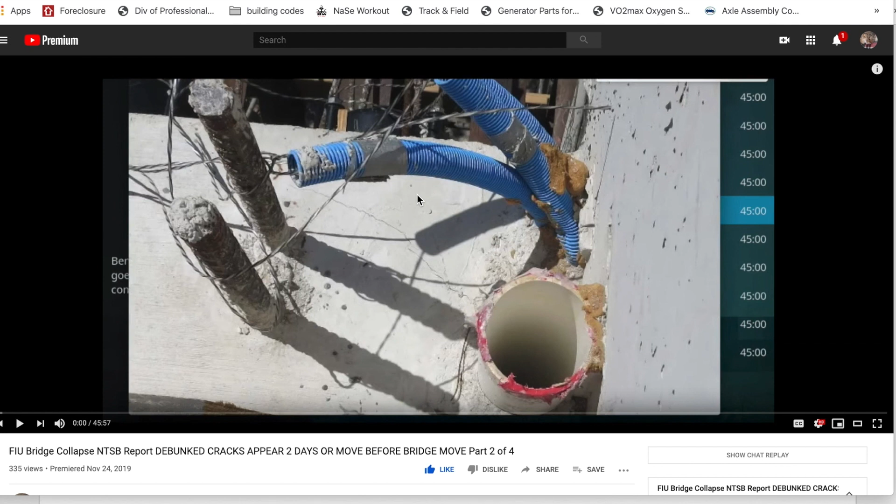Okay, so I had my engineering friend over the other day, and I'm trying to talk him into doing a YouTube channel. Ray, this is going out for you. Ray and I were talking about the FIU structure. Ray's a professional engineer, had a lot to do with the Department of Transportation, roads and bridges. It'd be nice to see him do some content. He's retired from the Department of Transportation, not from engineering. I'm trying to talk Ray into doing his own channel and sharing his knowledge over his 30 years. This is the smoking gun.

Well, let's jump into it before I get to the smoking gun. Let's back up to: last FIU bridge defendant settles with 3 victims. So this is about Louis Berger not settling. Louis Berger is going to go to court, which is awesome, apparently, at this time, proceeding to court, it looks like. The lone holdout of the $103 million settlement between victims of the March 2018 FIU bridge collapse and the companies they sued for negligence, Wednesday announced it had settled 3 of the 6 wrongful death lawsuits.

Do you realize they sued them for negligence and they settled? So this judge must have put something on there that you're settling, but I'm not finding negligence, I'm guessing. Because finding negligence would be enough for them to prosecute already. If the judge already found negligence, that's weird, right? Why wouldn't a state attorney just find negligence also? Well, of course we know why — her conflict, and money is a conflict. These people are millionaires, right? And millionaires don't really go to jail, do they, with the odd case when they kill someone. Oh wait a minute, they did kill someone here. Oh, but they paid for the deaths, $103 million.

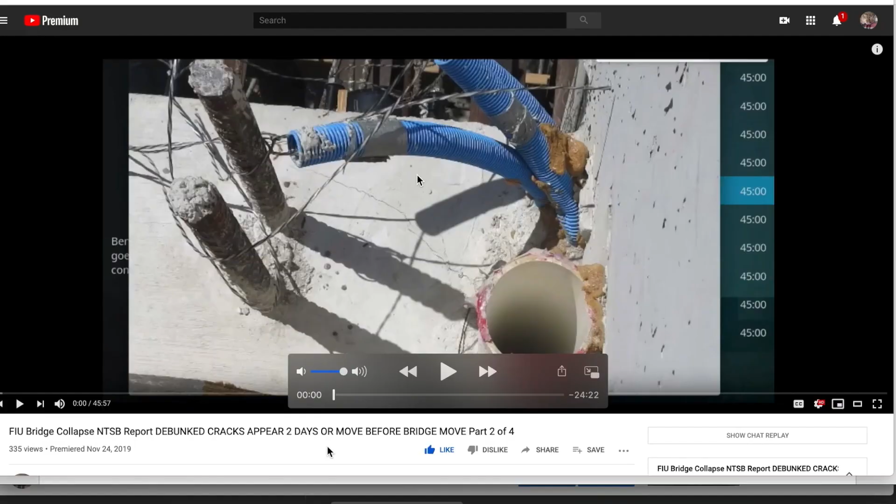Let's jump into it. Okay, right here, you come to the video called FIU Bridge Collapse, with Linda Figg, Denny Pate, MCM, and others giving audio of their design and thoughts.

The pylons are just for frequency. That's the pylons. It supports itself before we put the cables on it. Listen, before we put the cables on it.

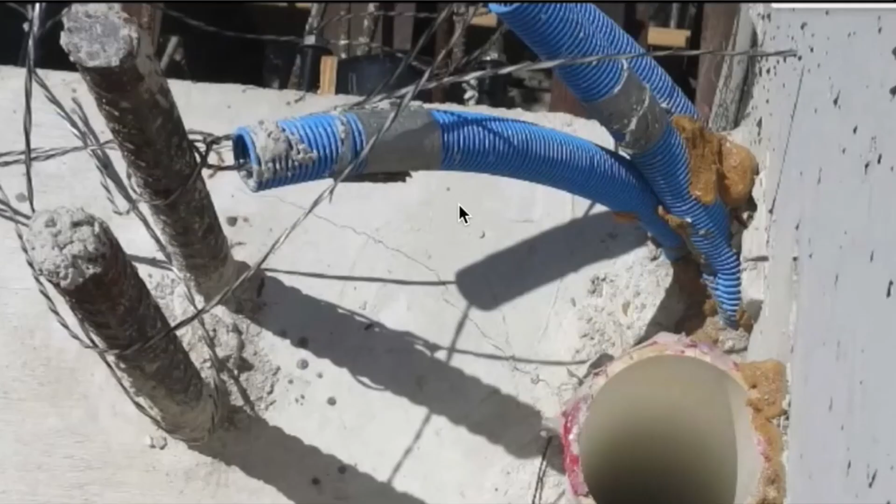Those are installed by working on the already completed deck. Yes, the strength of the bridge deck system and the roof will carry all the load. The bridge deck and the roof will carry the loads, not the truss system.

Those are installed by working on the already completed deck. Yes, the strength of the bridge deck system and the roof will carry all the loads. It meets all strength and serviceability criteria. The stays are really for the additional stiffness we need. Talking about the stays, he called them the pylons.

But the bridge deck and the canopies, what he says, the roof takes the loads, meaning in post-tension, longitudinal post-tension. I have one last question that I wasn't expecting to answer.

What is your tower called at each end? The pylon? Oh, at each end? Yeah, where the elevators are located. What is that thing called? The landing. The overlook. Yes, overlook. Okay, overlook. So that column of concrete that encases the elevator, yes.

Thirty years later, when we had to re-roof it... I'm sorry, no, it's all post-tension concrete, so everything's in compression. It's all post-tension concrete. Everything is in compression. Everything is in compression.

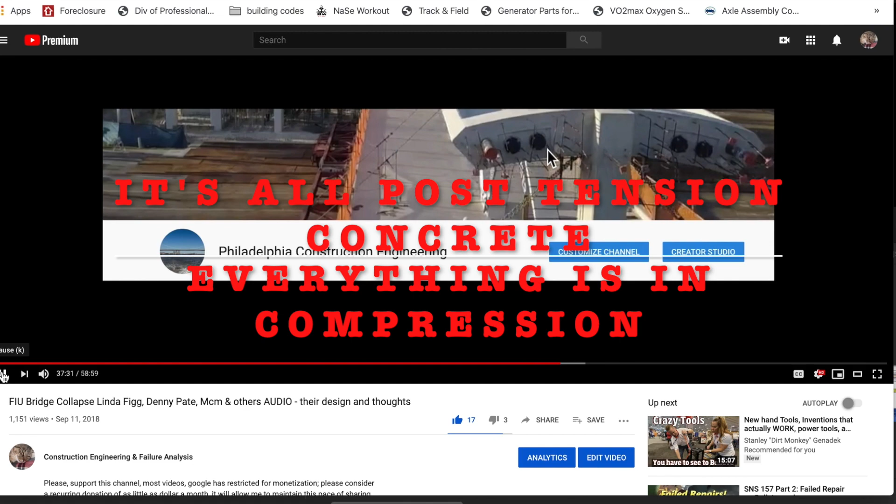She states it there again. There we go again. I'm sorry, no, it's all post-tension concrete, so everything's in compression. So you're going to maximize that durability well over 100. I mean, it's going to be like 150 plus years.

It's all post-tension concrete, so everything's in compression. So you're going to maximize that durability well over 100. I mean, it's going to be like 150 plus years.

The bridge basically takes its position across the highway in one night. Yes, sir, we will build pieces. Bob, tell me where I'm out of turn. Well, this piece gets built here and swings over in the summer. It drops in on the summer night. So everybody said, wow, one night.

And it supports itself before we put the cables on. It's the cables that we need to be able to handle the frequency for the pedestrian movement. See that, the frequency for the pedestrian movement, it's the cables themselves. It supports itself otherwise, she's stating.

You load the whole bridge up. We want this to be very comfortable for the user. The concrete allows us to do that. The stiffness of these stays allows us to do that. The whole frame system allows us to do that in a unique way. That's why we're integrating a truss and a cable stay structure all as one unit.

Which Linda, go back to the one day movement. One day. All right, that takes that. Now the next section to the north. Is that a second day, a week later, a month later?

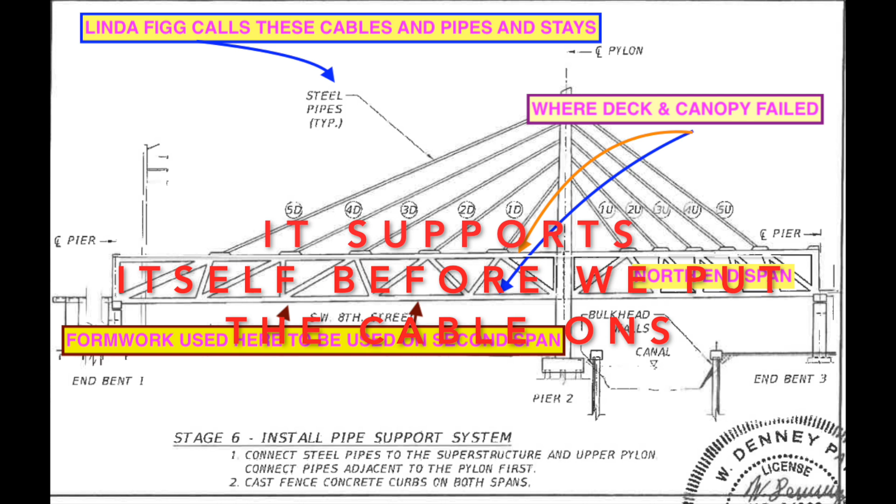If you load the whole bridge up, we want this to be very comfortable for the user. The concrete allows us to do that. The stiffness of these stays allow us to do that.

Now she changed it to the stiffness of these stays. Do you see where I went with that? First it sounds like cables, now she calls them stays. She can't keep her mind straight with whether she's talking about cables or the steel pipe stays.

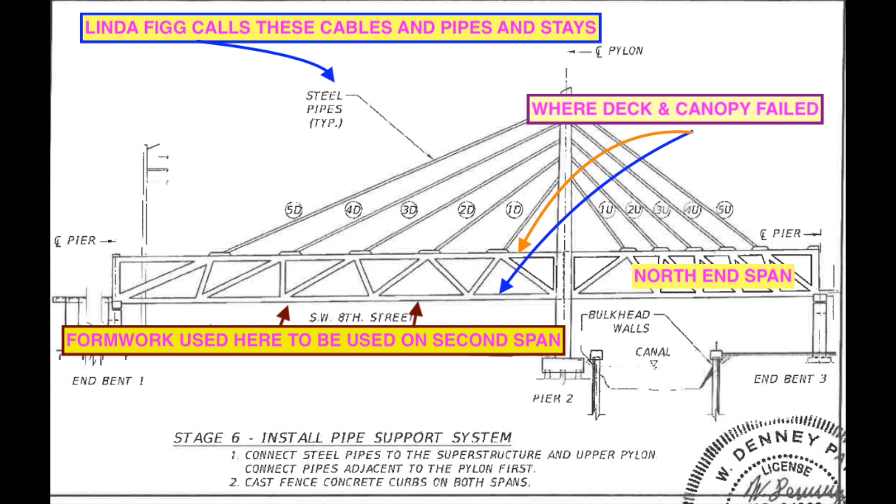The whole frame system allows us to do that in a unique way. That's why we're integrating a truss and a cable stay structure all as one unit. Now the entire bridge is in compression. If it's all in compression, you can't get deflection in the span. The design has a top chord and a lower chord, or a top flange and a lower flange. If you look at it as an I-beam, with an upper flange and lower flange, if it deflects, the top flange goes into compression and the lower flange into tension, but it's more complicated because this is concrete.

So it doesn't make sense. And if you're getting that deflection, you're now deforming your uprights, your diagonals.

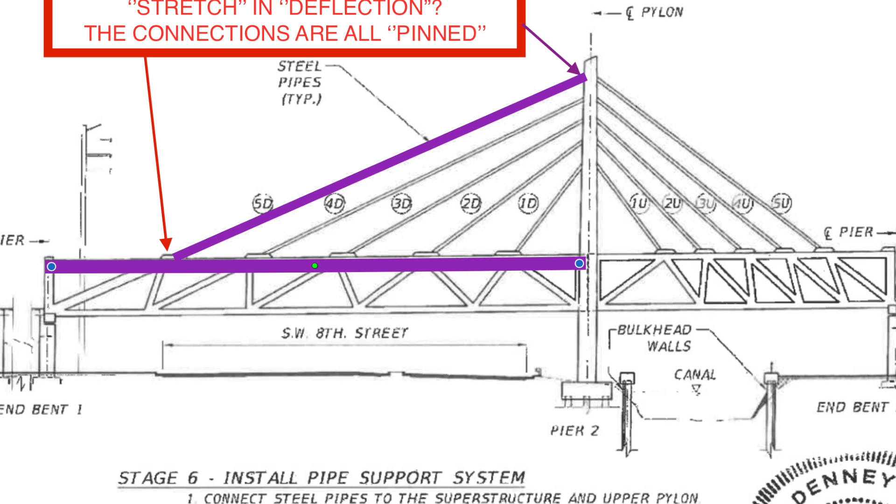The next 6 minutes of this video is a teaser video already put out, but I'm throwing it back inside this video just to keep the continuity going.

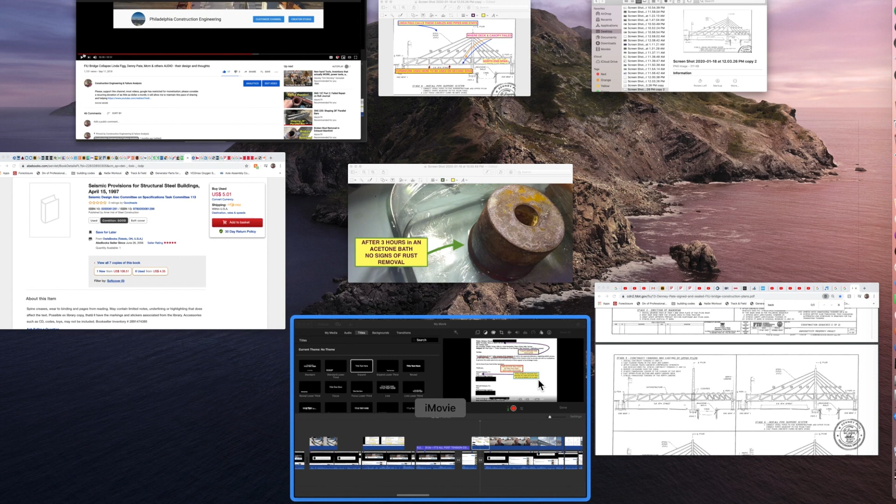In that video, it's going to talk about what I call the smoking gun, the cracks. We're always looking for a smoking gun. On the FIU bridge, the smoking gun is a few details, and part of those details are mentioned in the reports, memos, questions that go back and forth about the deflection after span 1, after removal of the falsework. This was a question on March 8th. It was also a question on February 28th.

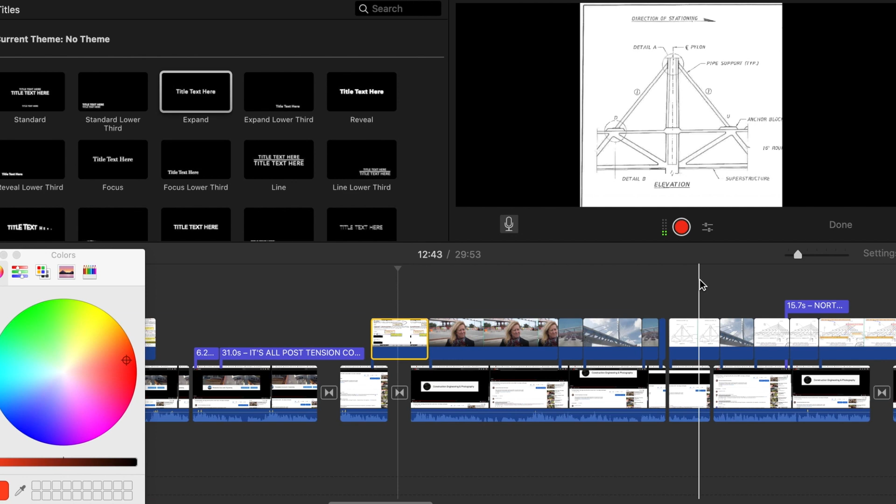This will be part of the video, and I'll go back and forth into the smoking gun of the cracks, but I'll also show how Linda Figg's concept of their design is kind of confusing to them. Not to blow it off, but this is Denney Pate's and Linda Figg's engineers responding. If you look at the small print, it'll be much better in the video. He states that on March 8th, two days before the move, through extrapolation we know they do not have the answer back as of this date, two days before the move, of why these other cracks are presented. He states the deflection is just expected deflection.

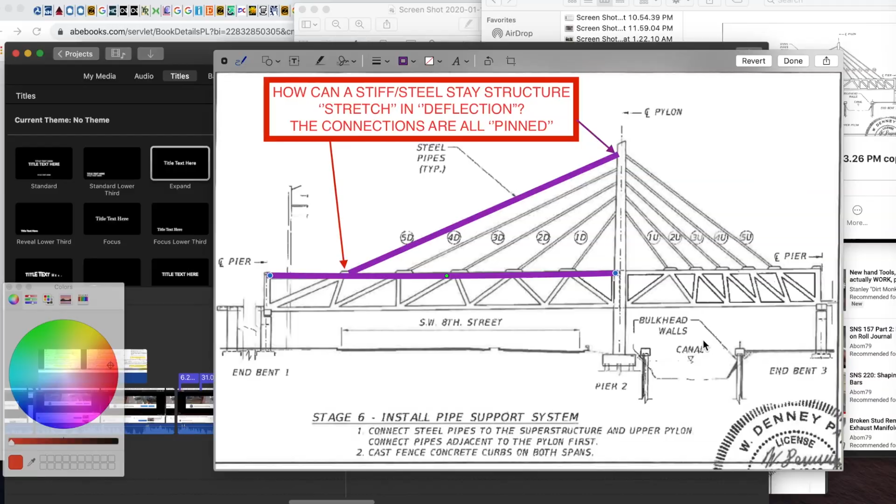Let's talk about that expected deflection. I can theorize the deflection is in the middle. Even though we have the break here and here, I think this is more like a crack or a brittle fracture, like a cracker breaking here and here at the time of failure, as the load and deflection happened, the stress is resolving here and here.

Watch how I'm in that video. I'm going to just hide this into the video also. So this is kind of a double video inside this video.

So this would be a steel pipe, secured with steel bolts. Nothing to elongate. They're a pinned connection, it doesn't slide or move. These are permanently locked in connections. Now watch this member, the canopy. If this bridge has deflection, watch what happens when I deflect just a little bit in the middle here. Do you see what happens with the deflection? At this joint here, it starts pulling down on it. But it has no choice but to pull down on it. Pulling down on it would create...

If this is just pulling down only, it would start pulling this over, and this side, connected here, would want to resist that. So you're going to get some failure at some point. You're going to start getting failure, some failure will start happening. The bolts aren't going to be able to hold that structure from deflecting. But we have 1, 2, 3 — you've got to combine them all to see how much effect they would have.

But the stays are there for resonance, not for support, although she calls it a cable stay bridge, and a couple other times cable stays — she goes back and forth. But deflection causes stress on this connection here, and including the middle connections, all the connections in both directions. The least amount of deflection would be using this scale here. You can see the least amount of deflection is closer down. This moves a half inch — did I get that right? You move a half inch here, least deflection on the outside. So you see that the stresses are still there.

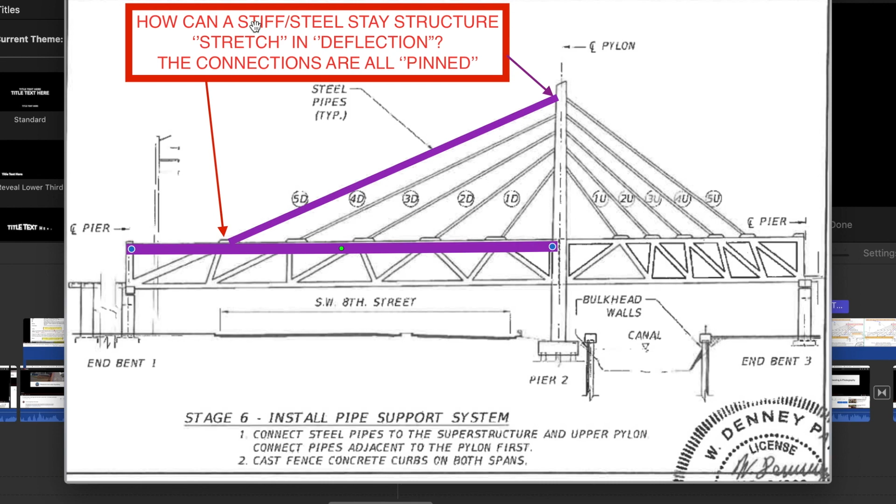Oh, this video is getting too long. I'm going to terminate it. This is my teaser video, but we can come back to that. Let's talk about that in a second here.

The deflection of span after removal of the false work—up here it's referred to as formwork and scaffolding. False work, same thing, okay? Same intent. Are within the expected deflections, with no calculations supplied.

And this is from a professional engineer at Figg Bridge Engineering: regarding MCM's photos, we need a better description of the locations and widths of the cracks in order to provide you with our evaluations. So MCM's photos that they sent over, which we don't have access to at this point, exactly per this letter here.

This is two days before the move, and they still are talking about evaluating cracks, and they have not determined what they mean.

In general, the cracks seem to be very small, and some of them appear to be shrinkage cracks. Okay, so some of them appear to be shrinkage cracks. And shrinkage cracks—how did he determine that? There was no testing done, etc.

Shrinkage cracks are on the surface, incidentally, guys, not transversing any member. There are no shrinkage cracks if they're transversing—shrinkage cracks must be on the surface. If it's fully through, it's a full crack, a full break, and at that point you've got your steel activating and handling the structure.

Just imagine if it's cracked through—the concrete is the piece to the left and right, north and south, however you like to look at it. Those are two separate pieces, only being connected by post-tensioning or steel. I guess if it was fiber cement I could argue it's also being connected by the fiber, in which case that's referred to as toughness—how long it takes to break apart, basically, layman's term.

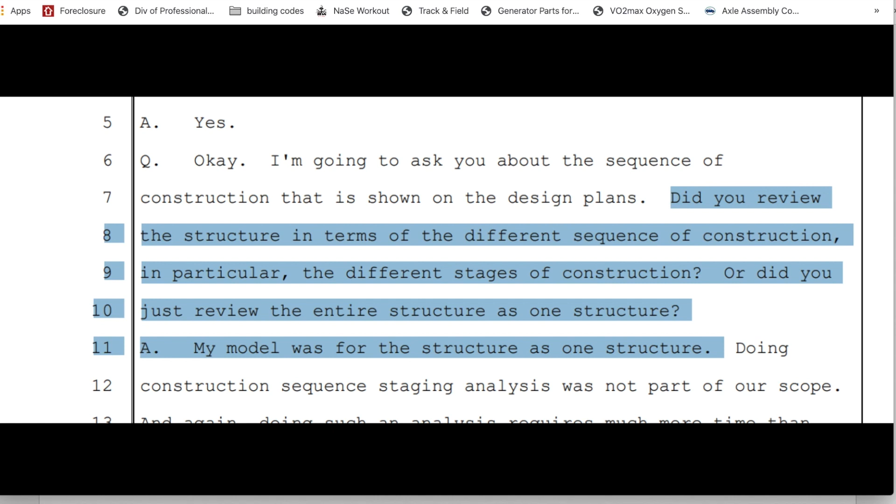That's Berger's position, period—so this was not done. Berger was basically saying, hey, this works as is, but you didn't give me stages to do, so how can he be at fault? Nevertheless, the lawyers are making a deal.

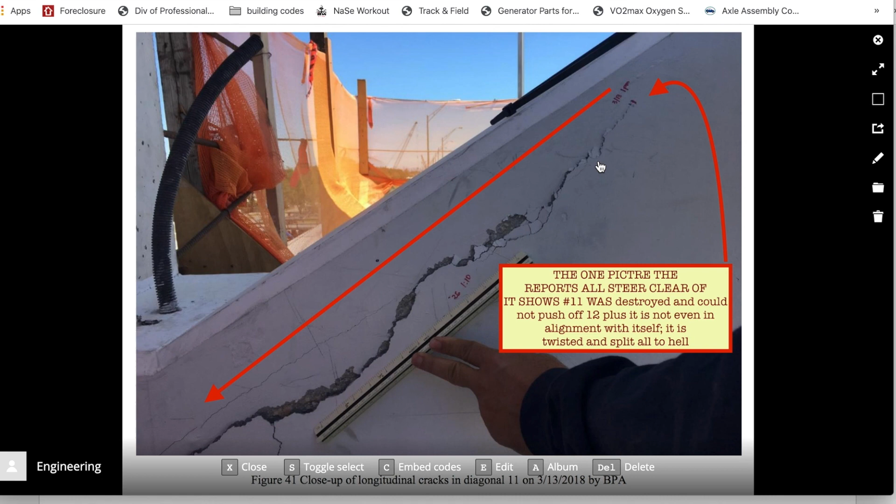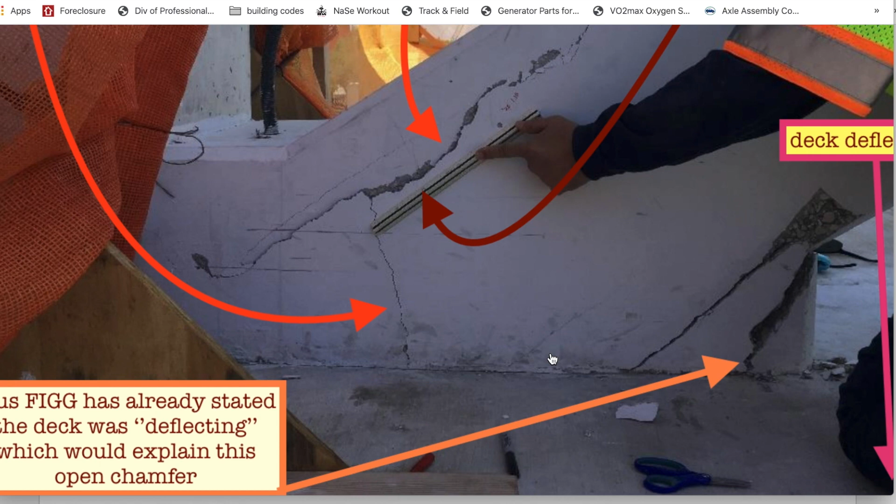Okay, that's just me talking about how can it be sliding. These are the engineers' images that we have present, and this is all of a sudden having a sliding effect. Isn't that amazing? This is supposed to be sliding, but if we look at this, this is open.

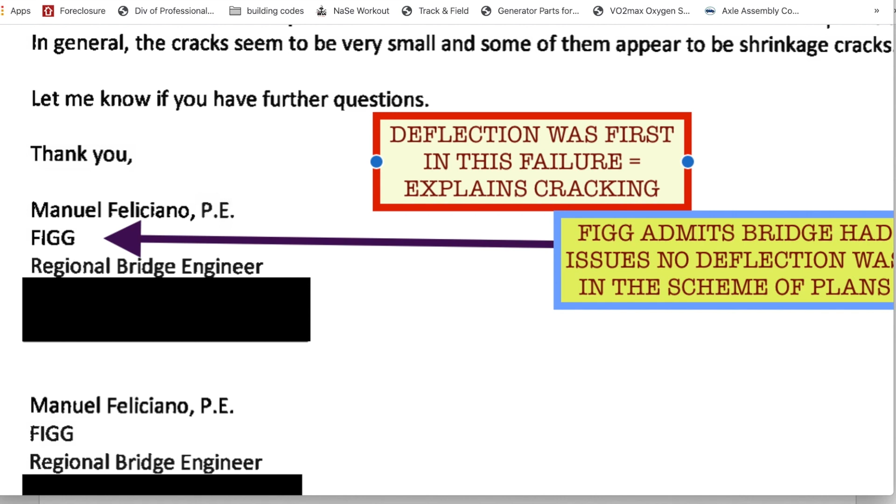This professional engineer is capable of seeing, evaluating shrinkage cracks to some degree here, and these others you can't evaluate at all because he didn't do it. We have, if this is sliding, how is this section here able to slide over?

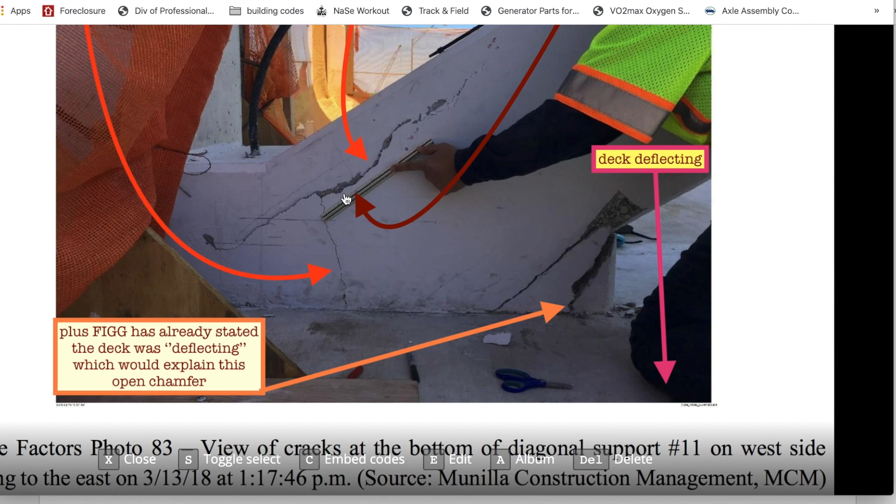Forget the post-tension—the number A bar, the lower post-tension bar, is in there and you can't go through it. And also the B bar, you can't go through it without causing disruption in this member here. These cracks are open in nature.

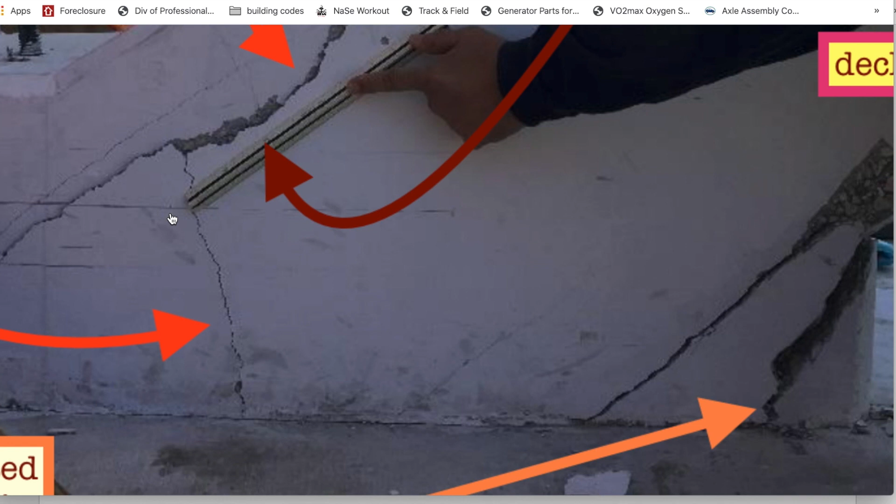How is this sliding and able to bridge this crack and then start pushing on this side? It's open in nature. I just find it's an assault on intelligence—my intelligence for sure, or anyone's intelligence. Any engineer that states that this is sliding, all you have to do is look at the deck, and then you look for the bypass.

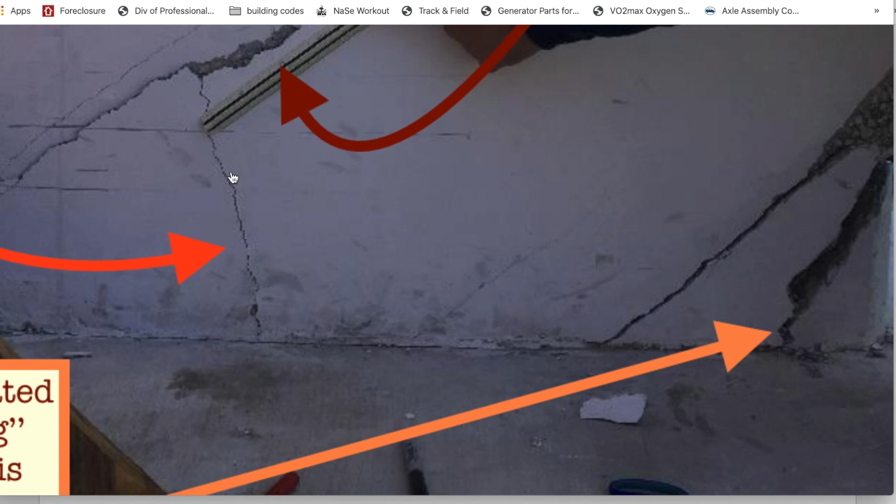You can see connections still there. You'd also have this gap to deal with, and you would argue that these cracks are not relating to any sliding, maybe some hinging going on, but no slide action is going on. This is not indicating of that in any capacity.

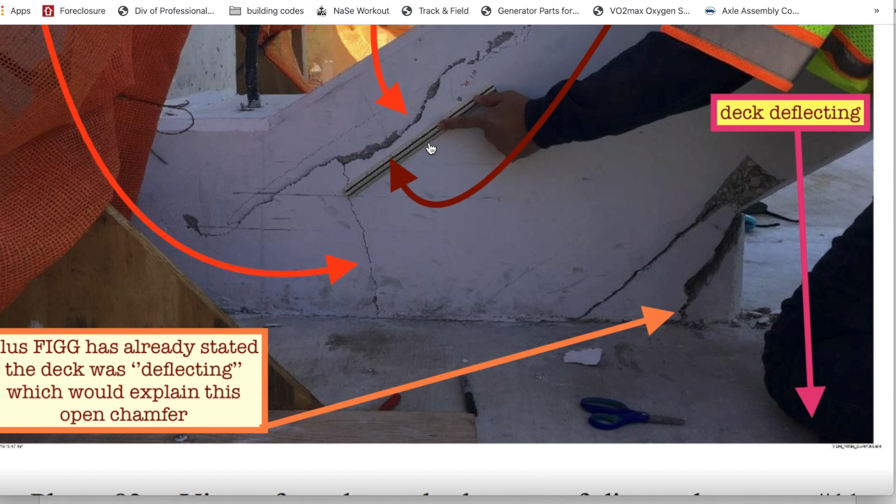Like these cracks, this is a twisting torque action. Number 12, leaning away from us in this capacity, and that gives you the torque action there.

FIU Bridge Collapse Model Part 3-A, Sagging Deck Explained, Longitudinal Post-Tension Failure. All right, so I'm referring to this—the sagging that the engineer refers to as acceptable is, to me, means that...

...that the post-tensioning is failing in this system. The longitudinal post-tensioning is allowing this deflection to take place. It can't deflect if the post-tension won't allow it to deflect.

And its deflection is the smoking gun image, again, would be here. This is why it's still over there in the staging area. This crack appears—it means nothing to them. They can't figure out why.

This is because number 12, with the post-tensioning still in it, no slide action going on—this is already, if you would get down here, you would see this is already elevated, and a torque action has already taken place in this millimeter, thousandths of an inch, let's call it, because it's under an inch, so let's just refer to it as thousandths of an inch.

You could scale this with a gauge and actually see the elevation change in this concrete.

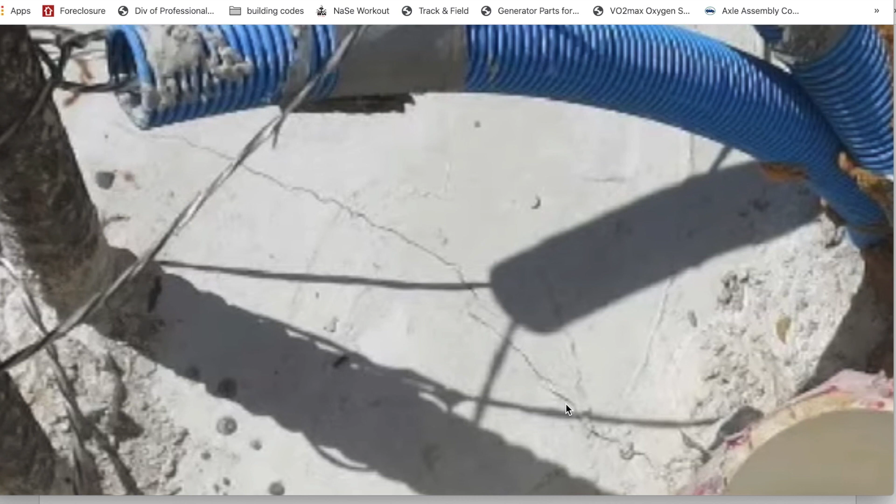So don't just visually try to look at it—you can literally use a scale, and you could come down here and say this is 3 thousandths, and down here you could say it's 6 thousandths of an inch. Wow, it's elevating, and it's elevating from here to here, and this means something.

This means this torque action is taking place. And keep in mind, though, this is while it's sitting on top of the piers. It's still in its original position. That means the most support is present.

Minus the tie down here—there's no tie down through this hole here to help it with some rotation, but there appears to be no lift off on this steel.

Nobody's taken any measurements off this steel. It's probably in the thousandths of an inch again—again, I'm breaking it down, don't think less of thousandths of an inch. That means I just broke it down to an inch to 1,000 scale.

And no movement is no movement. In other words, I could put a thousandths of an inch scale on this and there's no movement, right? Steel. So you have this center of the structure.

The scaffolding is removed as reported by everyone. At this point, this appears notably so that they photograph it, but they can't explain it. This is because the torsion took place in this, what they call an I-beam. And I'm saying you're looking at an I-beam torsion, that's all you're looking at.

That explains this crack, number 12. The torsion that took place is because of the scale, the ratio of this thing wasn't—the computer didn't pick it up, the engineers didn't pick it up. They were counting on the computers to pick it up, obviously.

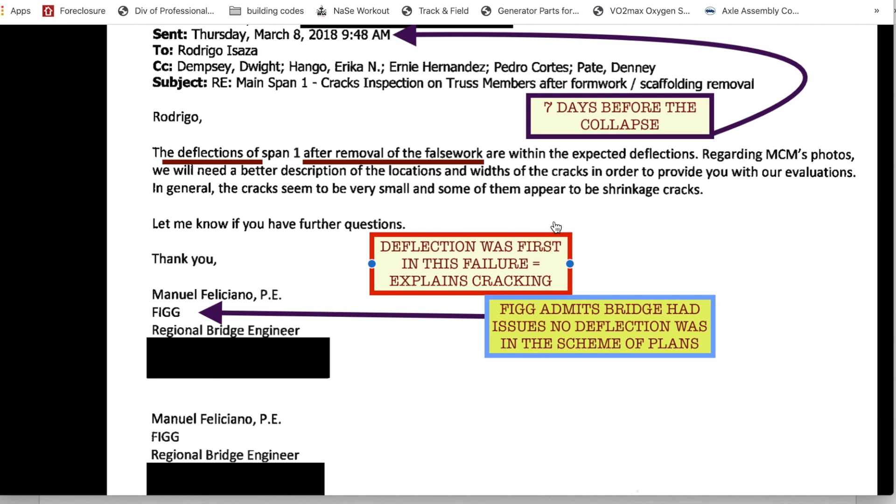So this torque took place on number 12, a rotational torque, the elevation. Again, I'm against the sliding taking place because of the imagery. The imagery after post-tensioning develops more of what's going on, and it shows, allows greater, the torque action to show itself.

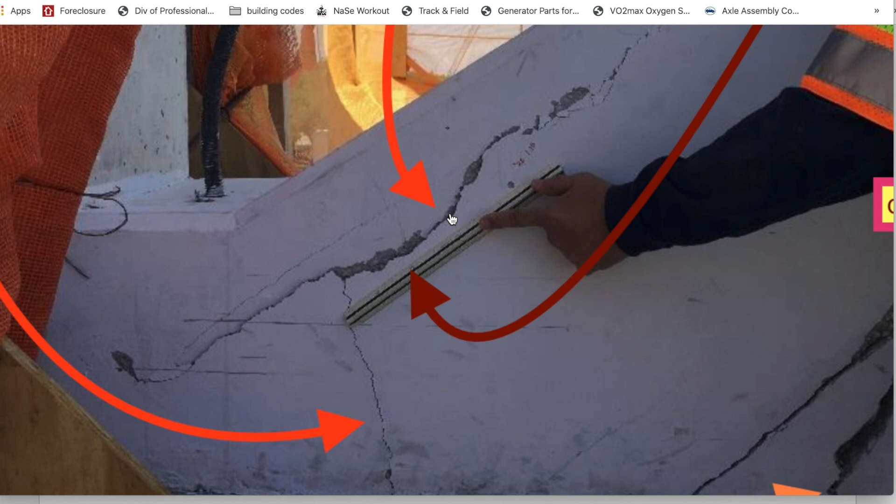To me, this would probably mean that blister in the back, this design, the blister in the back was what was holding it together. The top upper bar here was holding it, that torque action, holding that rotation in a more firm location.

But it can only do so much because it's on an axis, right? It's only at one point, it's in the center. Think of it as nailing a stud in the center, top and bottom. You can rotate the stud, spin it around the circle, right? Center line, I said, you can spin that stud around.

You add a second stud, and now you can't spin it. Second nail on each end, you can't spin it. But in this case, there is no second stud out here to hold this in place. It's just a single nail, if you will, in the back of here. So it would allow the rotation easier.

Remember, the post-tension bar is in the deck. That would be the second stud, but it's not in number 12. So this is what's going on. You've got a bar here, and then you've got a bar sticking outside the deck in that blister. And when they detensioned it, the forces could greater rotate, and it's indicated there.

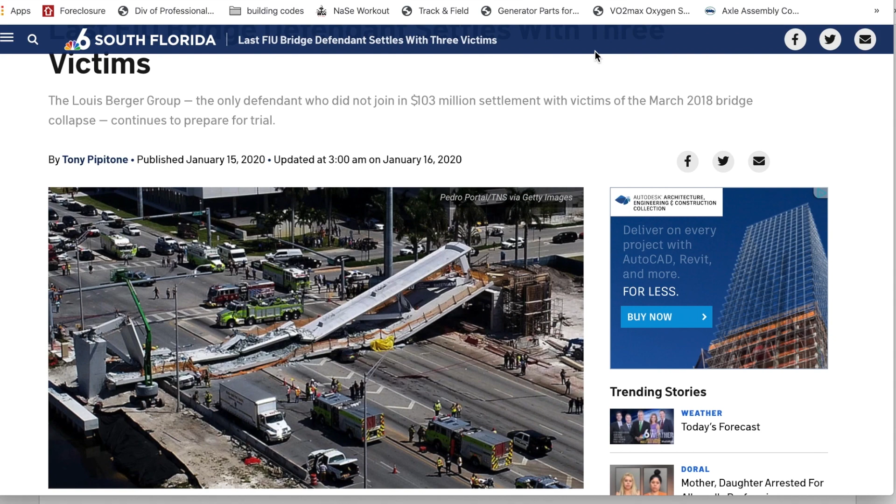I'm going to terminate this video, but it looks like there will be no court case. Louis Berger, defendant, settles with 3 victims, right? Looks like there'll be no court case. Maybe they would settle because technically, right off the bat, they were negligent because they didn't have—

Reportedly they didn't have the authorization from FDOT to be doing this type of inspection. So once you prove that this inspection is out of Berger's qualifications, you then can prove negligence at that point, in my opinion. At least if I was a juror, I would say, oh yeah, it was out of the qualifications, they shouldn't have been doing it.

Over here, when you come to this video, you'll see what I've made now, a new list called Debunked Cracked. It's about 17 videos, I could probably add a couple more to them. This is the smoking gun, if you're looking for it.

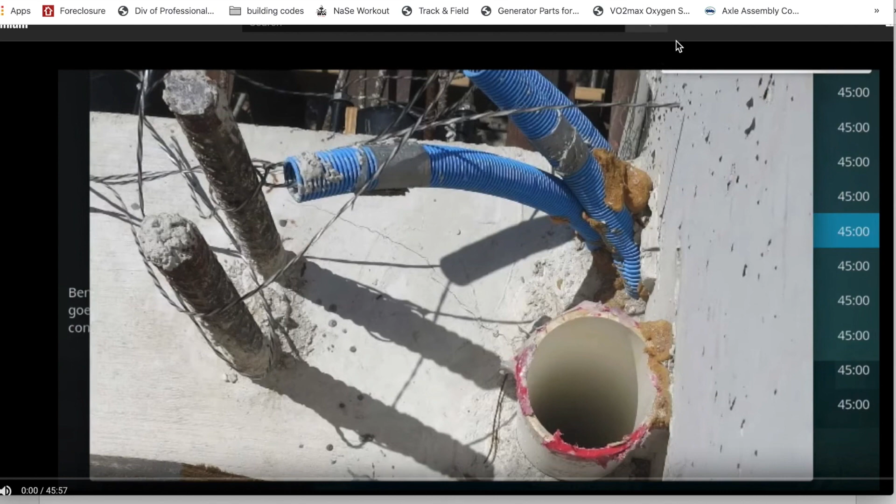February 28th. The truss crack members, and also no one knows why. This is the smoking gun crack here. This will be the smoking gun emails here. Right here, 2 days before the move, deflection of span 1 after remove false work, are within the expected deflections.

But then the next sentence, same paragraph, they need a better description of the location and widths of the cracks in order to provide you with our evaluations. What evaluations were ever done? No, this was just a rush to judgment, a rush to get it done. That transporter was there at a cost of hundreds of thousands of dollars or whatever it was to move the bridge.

So they didn't want to start arguing over a fine line because it was holding up everything, thinking you've got something of value. Imagine me trying to hold up a structure, telling somebody, look, this means something, we shouldn't do anything, we've got to figure this out first. All engineers would blow me off. They would think nothing of this crack and blow me off.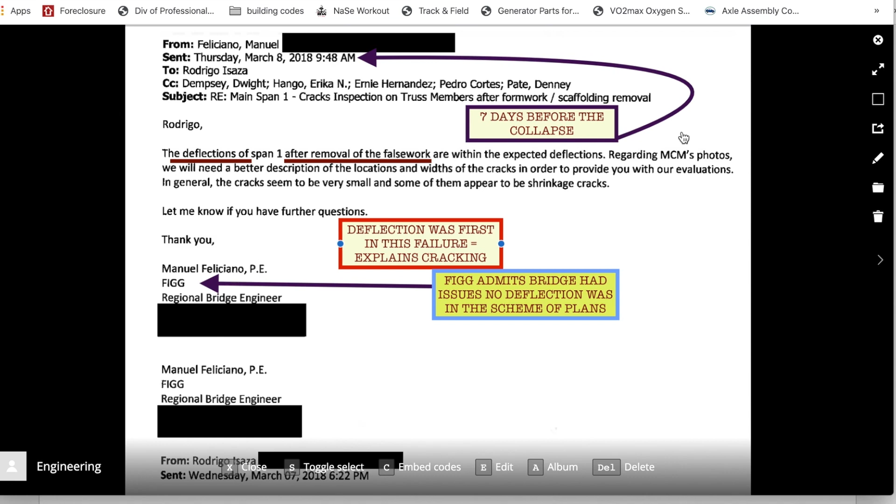They would say, oh, I don't know what it is, but—they would say something like that. I don't know what it is, but we can ignore it, keep going. And this is apparently what took place. I know that all cracks are saying something, they're identifying stresses in the structure, and if you can't figure out where they're from, that's the major issue there. That's your major issue.